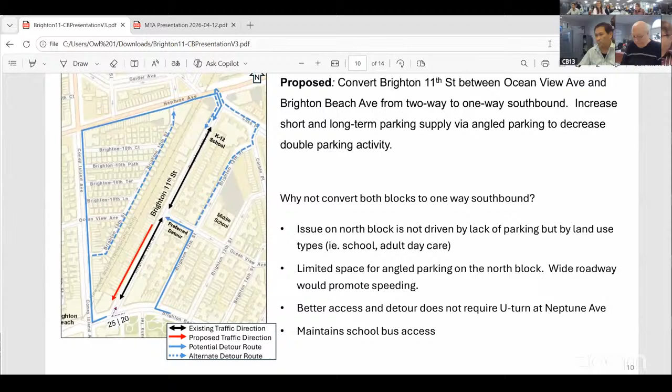While we're preparing the presentation - is that the same study, based on the same study that at some point community board was requesting, or is something different? They can answer that, I can guess, but yes, they can answer this.

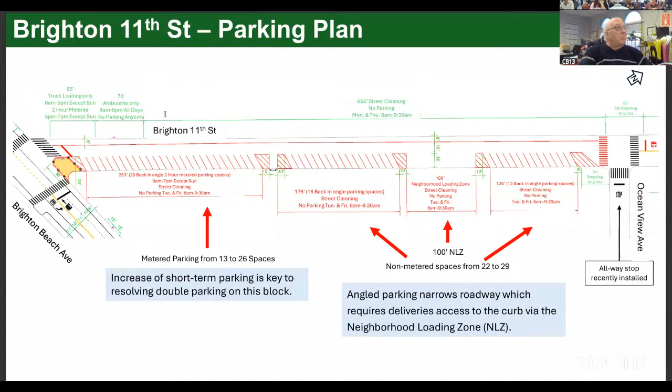You're not really gonna see it in any of those photos, because I'm further down. We're in between. Yeah, well, there's a lot more and they stay.

As it is now, the fire truck has no chance. That's the point - kind of damned if you do, damned if you don't. It's bad now, it gets down to one lane, especially as it gets down to Brighton Beach Avenue, right? Where the vehicles going southbound will often just come into the northbound lane because they can't get through. There's actually a cement curb across Brighton Beach Avenue, you can't see it, 1.5 feet wide or so, that stops it.

It doesn't stop fire trucks, and your complaint about Cass Place cutting out the U-turn, it didn't used to be there. I have seen plenty of cars just drive right over it to the detriment of their car, their alignment or whatever.

So I'm just - my opinion would be that the 44 feet is... I am definitely in favor of one way. We have it on Coney Island Avenue, which is right around the corner there, going south to the beach. Wonderful, but that's more in the 100-foot wide street, and it doesn't represent much of a problem.

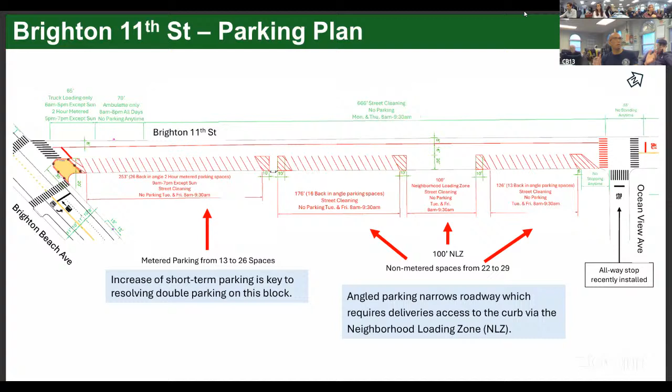I'm unfamiliar with the problems of this street, but I do know the street. When coming up with the solution, did you look at streets similar somewhere in the city where this solution was implemented and it did in fact reduce double parking? Or is this a very particular solution to this street based on your parking survey? And I'm also interested, how did you do your parking survey - 311 data, accident reports?

Video. We did the video ourselves, installed 5 cameras on both blocks, walked it over the course of 2 days and counted it. If you move forward, I'll show you real quick - these are kind of anomalous. Keep going forward all the way past the ends. There you go, one more - this is actually the survey.

You can see specifically, all of the blue is double parked or illegal cars, the orange is double parked or illegal trucks, specifically by hour, and the parking maneuvers made on each of the 4 segments. Here we're not talking about doing anything because it's very low, but we did the survey and all the counts ourselves. Specific to the solution, it's just a general rule that if you increase the short-term parking, it will decrease the double parked vehicles.

You are correct, some of them are not going to do it, but over time, and this is what we did see, a lot of those pickups and drop-offs would then U-turn to use the metered parking if it was available. If not available, maybe they go elsewhere; if they know there's no elsewhere, they sit in front. But a lot of them who were dropping off would U-turn into the meter parking - you can see that right here in number 3. There were 184 double parked vehicles over the course of 9 hours, and 78 parking maneuvers - that was 78 vehicles that did a U-turn and parked in the metered parking, the highest amount of parking maneuvers where we had the short-term metered parking.

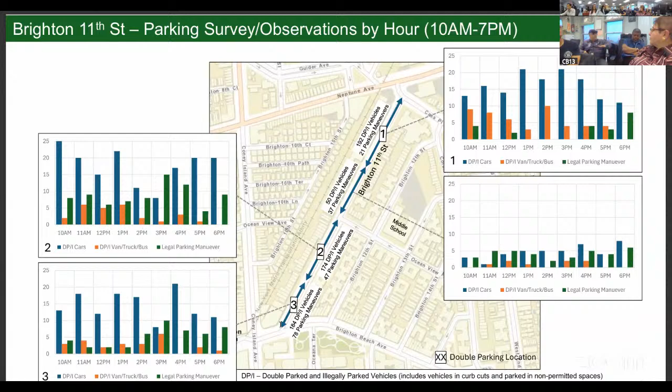Coney Island, the short lane feeder between Coney Island, what it does is it often blocks this intersection. It creates a lot of frustration for the vehicles headed southbound, which is why they end up going in the opposite lane trying to find their way out of it. It's a difficult intersection, as is Coney Island and Brighton Beach.

Do we think there's gonna be an implication of so much traffic building up going southbound to get to Coney Island Avenue, like to turn west to get to Coney Island Avenue? I don't know why I'm thinking that's a potential implication. It shouldn't add any volume to the southbound.

The only thing is, everybody who wants to turn onto Coney Island Avenue gets queued up and backs into Brighton 11th Street. That might be a problem - I don't know how you solve it, but the timing on the light isn't quick enough. And if it is quick, you can't make it. It's not necessarily the timing of the light, it's just backup, congestion there.

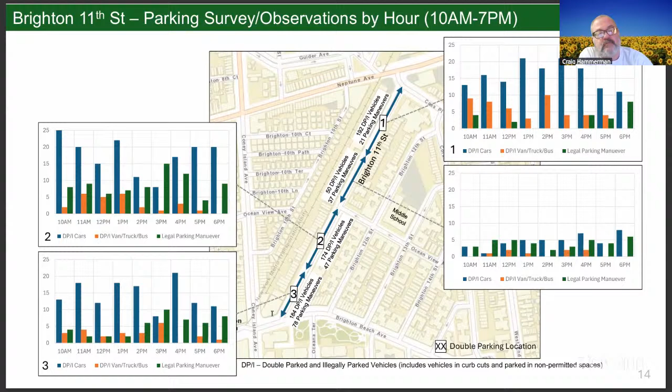One thing they could do is actually eliminate the 3 parking spaces on the north curb of Brighton Beach Avenue and put a dedicated right turn lane in there, because right now those 3 parking spaces are costing everyone. We could look at it. Those are used by the grocery store that's there. A dedicated right turn lane, that would be good. It's definitely a comment we'll take back.

The last thing is, I think it's gonna take more than just DOT. We have to change the culture on Brighton 11. All the double parking, people are just used to that. There's no signage that we have at DOT that's even legal that says no double parking. So what we have to do is take enforcement, but also a new design to possibly add more spots so people would know where to go. But again, that's the culture - it has to change.

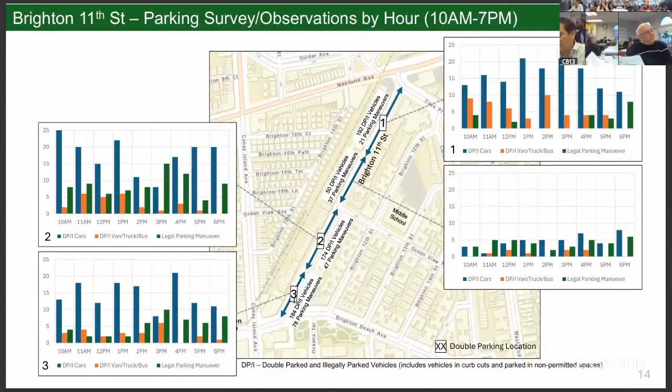Early morning and afternoon there are stacked up buses, you're not getting through that area - school buses waiting for pickups. The playground is now all parking - actually at the grade school, 225, it's now all parking. I don't begrudge the teachers parking, I'm just saying they've had to eliminate outdoor recess in order to get teachers to show up at that school, otherwise they can't get teachers to come.

If the drivers find that to be a problem, after a couple of days trying it they'll go 'oh, this isn't working' and come up and around - there's other ways to access the road. But yes, you are right, that is the preferred detour that probably Google would send you on. But once you go there twice and realize you're there at 2:30 when there's buses everywhere, maybe you determine it's better to go this alternate route.

Okay, that was the only question I had. I hope this helps with street cleaning and everything else if you in fact implement it. Thank you for the presentation, that was very nice, and we'll upload it to the project page.

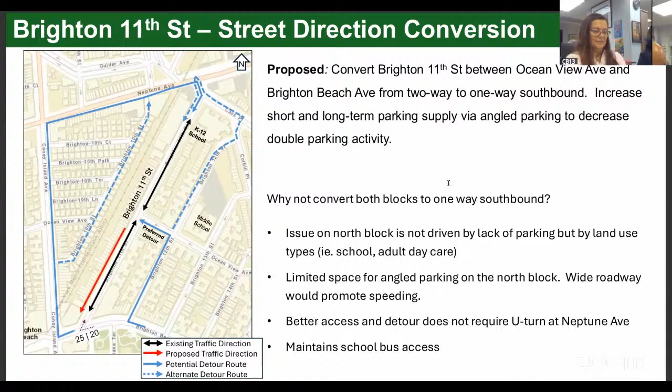So just to bring everybody up to speed, we brought some questions from the committee as follow-ups from previous meetings, and sent it to Anthony, who is a representative from MTA who we work very closely with on that committee. He will update us on those issues from the prior meetings, last year and this year. Thank you, Anthony.

All right, good evening everyone. Anthony Drummond from MTA New York City Transit Government Community Relations. Thank you very much again, Olivia, for the introduction. Yes, the committee sent over a few questions. I'll do a follow-up for those here and then take any questions back.

I'll touch on the big one first, which this committee has been bringing up quite a bit since I've been with the Transit Authority, regarding the noise issues with the trains at the West 8th Street Station. I talked with our Maintenance of Way MOW committee, which in turn talked with our Capital Division. I sent an email a couple hours before this meeting that they just wrapped up today on the lubrication on the tracks heading north, Manhattan bound.

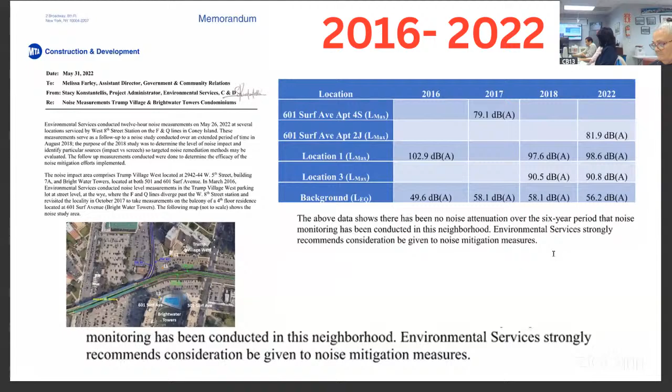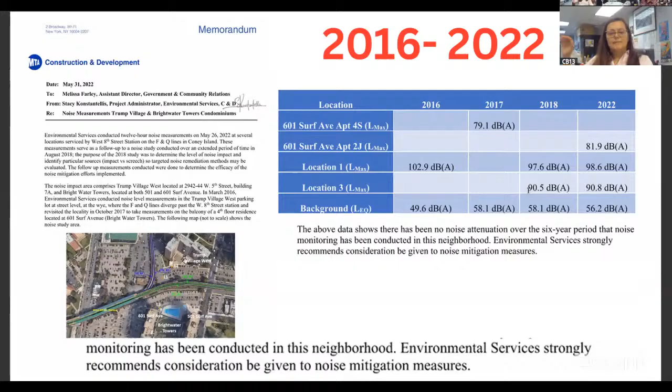Okay, let's go next - this is from MTA. Those reports were done in 2016, 17, and again - if anyone's interested in technical details we can share those presentations - but you see the numbers are quite high, like in 2016, 17, 18, and then in '22 some work was done. They started lubricating again and it came down a little, but it's still in the 90s, which by OSHA and World Health Organization standards is damaging.

What it does - not only hearing loss, but also stress, fatigue, and concentration problems for the kids. Let's not forget, we have an elementary school, PS 100, that's also affected by this noise.

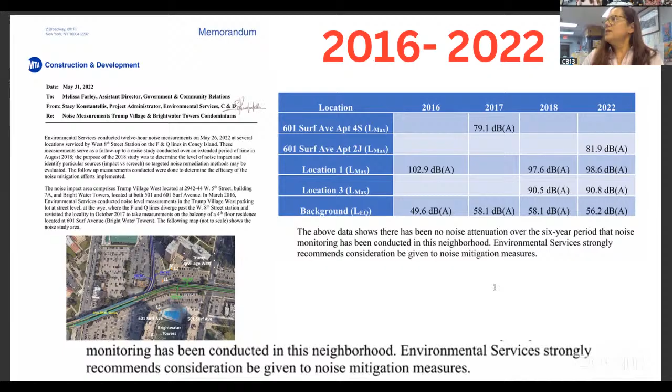Okay, 2023 reports - let's skip ahead because I have a comparison. That was done in 2023: installation of resilient rail fasteners, wheel dampeners, wheel truing, and rail lubrication. And then let's go.

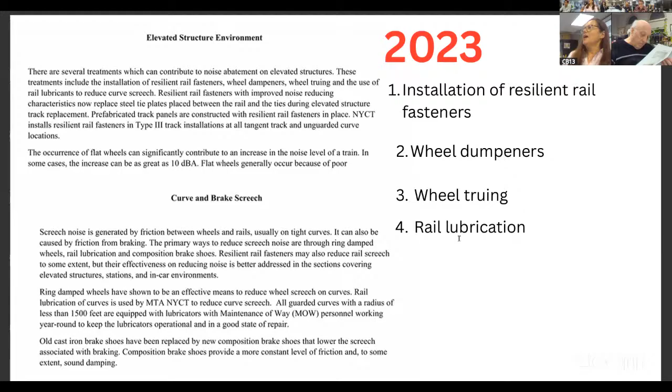Hold on one second. The station environment.

Why do I emphasize this? The MTA study concluded that the station environment benefits from almost all noise treatments, because noise escapes from the station. When you stop it at the station, that is most effective.

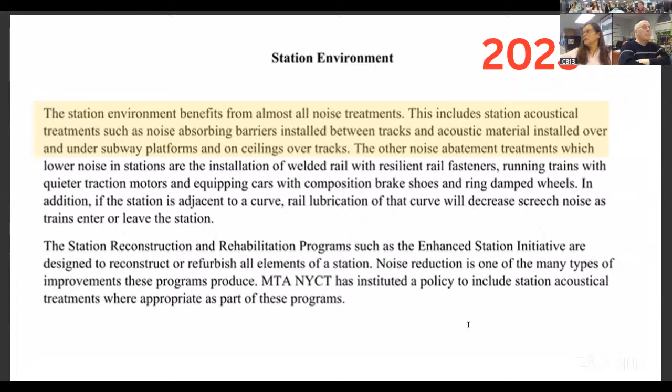Okay, let's go. So lubrication, 2024, that's when it happened - switching from mechanical lubrication to electric. That's the system that is staying on the rail. You could see sometimes, I saw those boxes on the rail, and it was done in 2024. So it's supposed to be working for two years already, or at least one year.

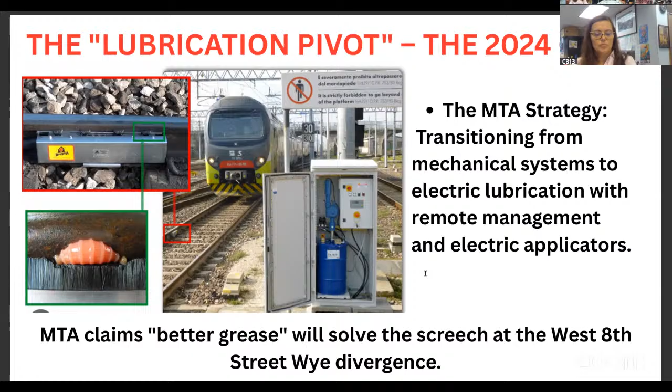It's supposed to diminish the noise by at least 10 decibels. And when we say decibels, it's progressive - the difference between 80 decibels and 40 decibels is 10,000 units of energy.

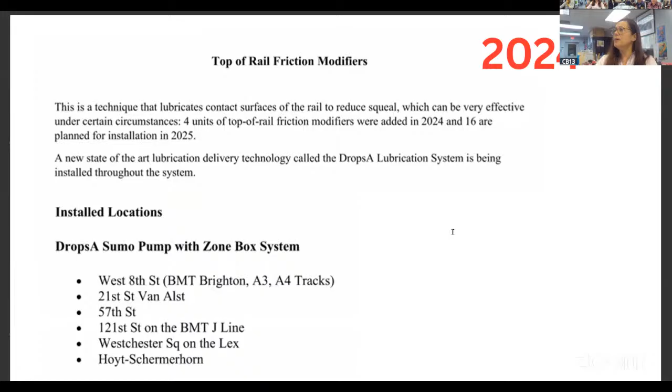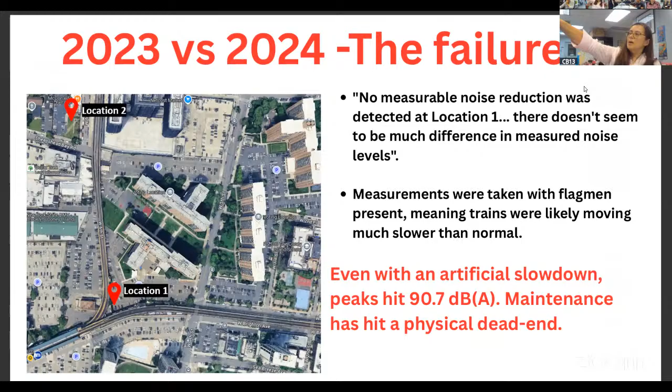There is no measurable noise reduction detected at location one - my comments from MTA. There doesn't seem to be much difference in measured noise levels. Measurements were taken with a flagman present, meaning trains were likely moving much slower than normal. So who knows, if the flagman wasn't there, it probably would be the same.

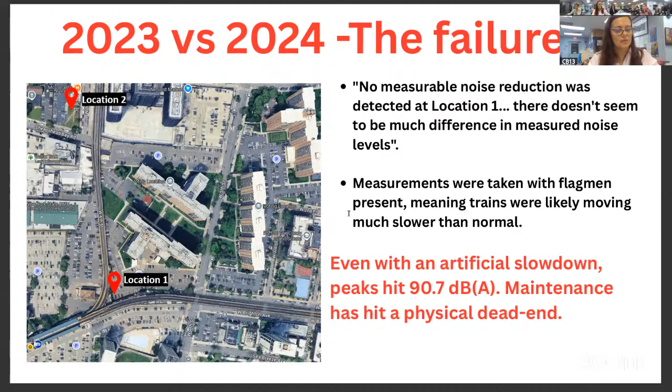So this is what we call the math of the best case failure. Now let's see what the goal is. We're right now at 90.

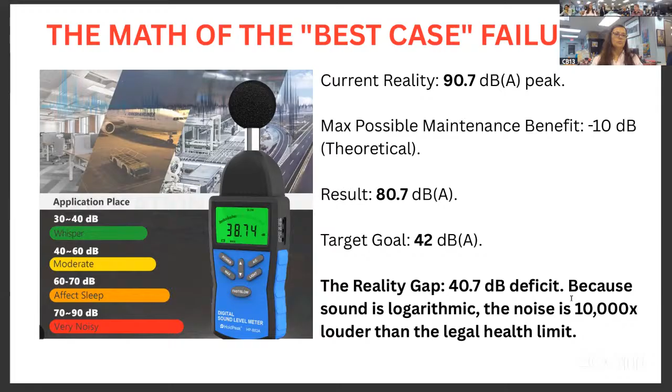Let's say that works, something happens and we measure it's 10 decibels lower - we're still at 80. We need to be at 42, by MTA standard. We're not going to get there. It doesn't matter how much you lubricate those rails, it's not getting to 42. And this gap is not going to be covered even at the best case scenario.

So what is planned? We're going back to saying, please make a pilot program. Look at what is done in Chicago, look at the station with the acoustical enclosure. Why are we talking about Chicago? That's the same 100-year-old elevated train structure.

So when they were doing it, they didn't touch the existing structure, they didn't use it as a foundation. They built around it, and they were pretty successful. That structure can reduce the noise by 40 decibels. It's lightweight, it's transparent - the panels - and it could be used in any different parts of other elevated train stations.

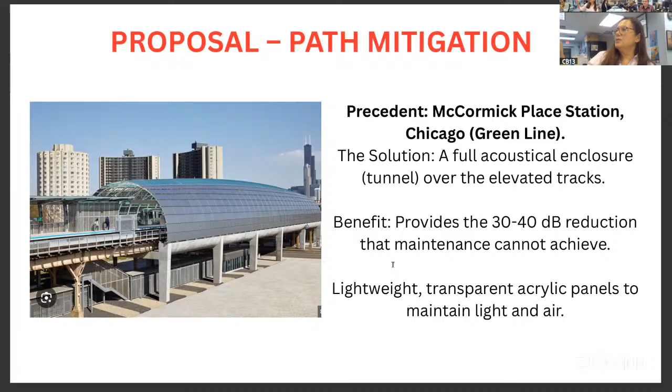Okay, let's go to the next one to show. So when we estimated a few years ago, we found the person who did the estimate for MTA and for CTA - the Chicago Transit Authority. We asked and found somebody local who was the estimator for the extension on the Green Line.

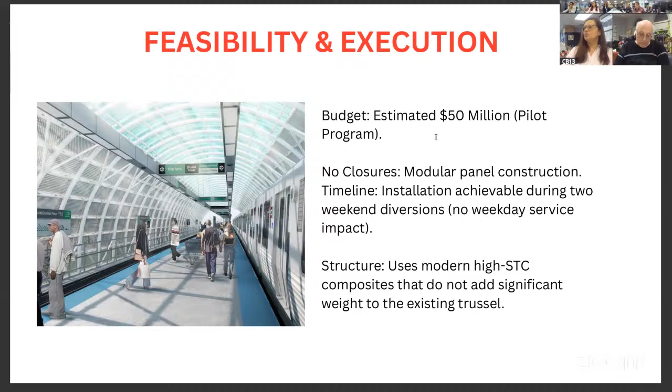There would be no closure for the train, only for two weekends. That was done in Chicago, only two weekends. They used modular materials and special acoustical materials for the structure - again, those are details.

Let's go next. So that's what we're asking - please make the pilot program, because even if you succeed, it fails to bring it down to 40 decibels. Making an acoustical enclosure, in our opinion, is the only way.

And not only that - it will be good for the neighborhood and for the economy. It will be good for MTA because the space under the train would be used for commercial leases, for parking.

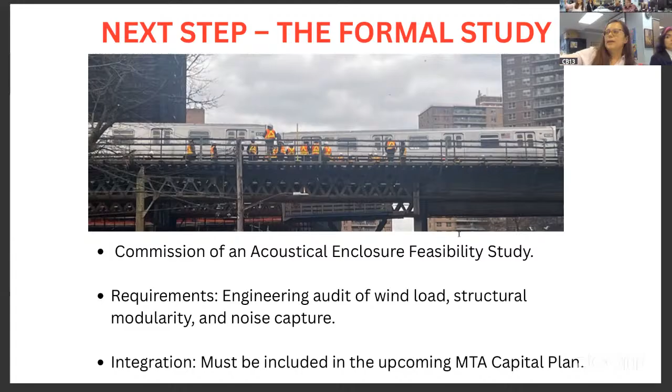So if we can do for the next step, if we can have a commission on acoustical enclosure feasibility study, can we have just that? Just to have a study to say, okay, that's a possibility, and keep open up to this idea and how much it could be done.

And you can have revenues. Did it go to the MTA? No. I mean, we can just do it on paper, we're not elected officials for sure, but it brings your revenue. If you enclose it, you can use space underneath for parking, for commerce, for anything. And trust me, Brighton Beach, Coney Island area, that's not cheap.